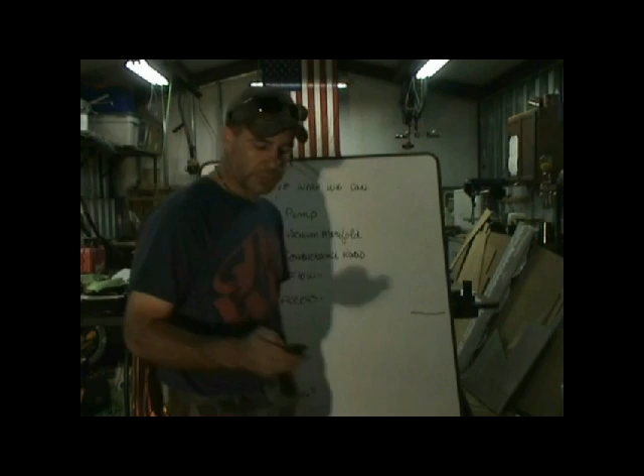Okay, so we're going to cover now improving what we can control. Some things we can't control: the size of the copper on our system, the size of the copper used in the coils, the 1/4 inch access fittings. Those things that we can't control, we're not going to worry about. The things that we are going to worry about are the things that we can control. And to better illustrate that, I wrote them down on the whiteboard.

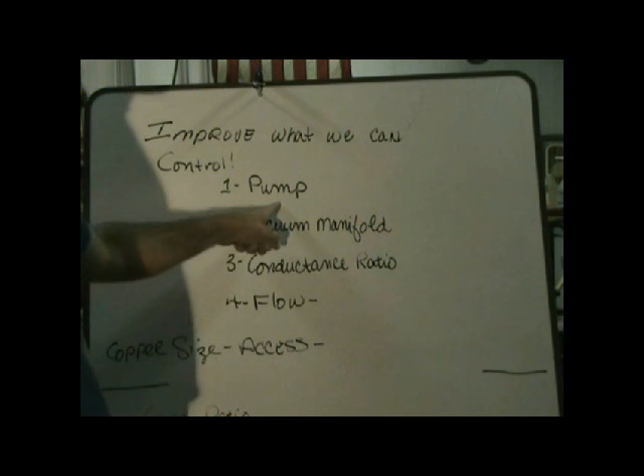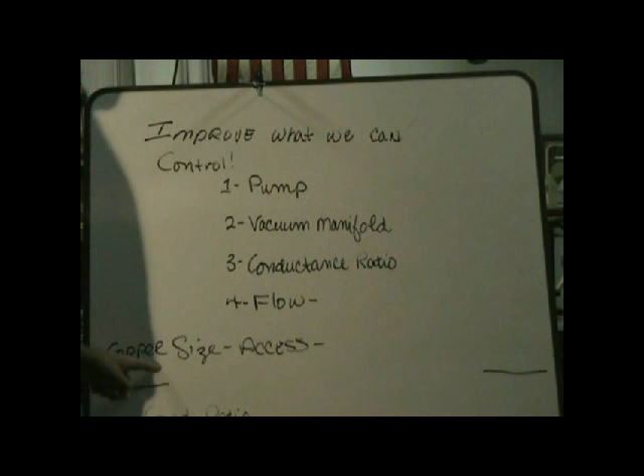So improve what we can control. The vacuum pump, choose the right pump. The vacuum manifold, build the right manifold. Conductance ratio, directly related to our vacuum manifold. Flow, directly related to conductance ratio. Again, what we can't control: copper size, access, all those things that we can't.

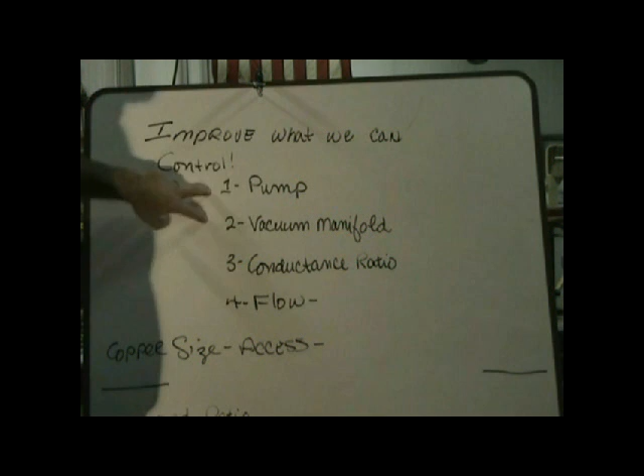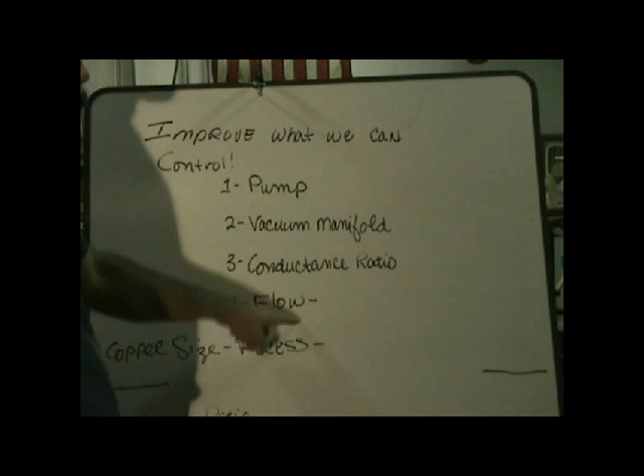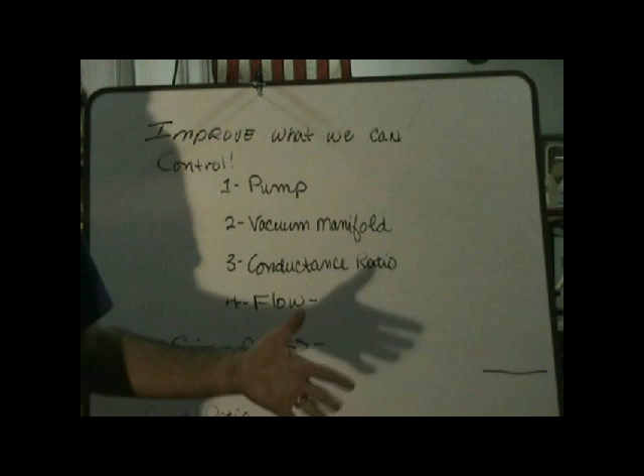So what we're going to improve on is really two things, the pump and the vacuum manifold, because the conductance ratio and flow, the higher we have the conductance ratio, the higher the flow we have, and that's how we're going to build our manifold, so we can control the pump and the vacuum manifold. And we're going to pick the right pump, and we're going to build the right manifold, or buy the stuff to build the right manifold. Very simple, very easy, and that's what we're going to do right now. We're going to build a manifold.

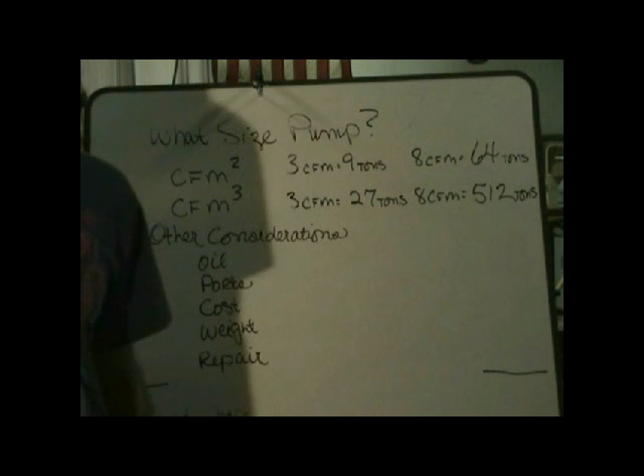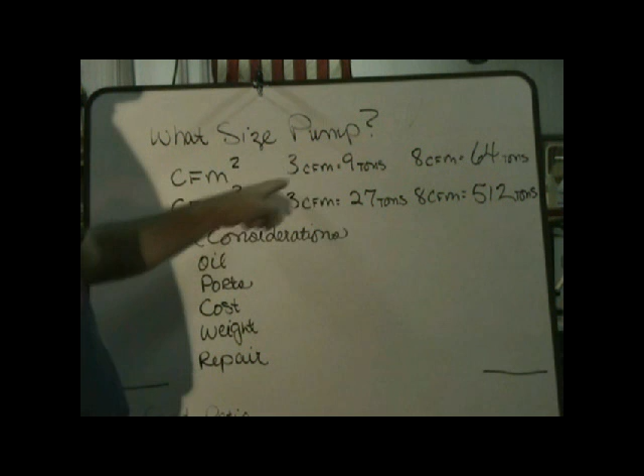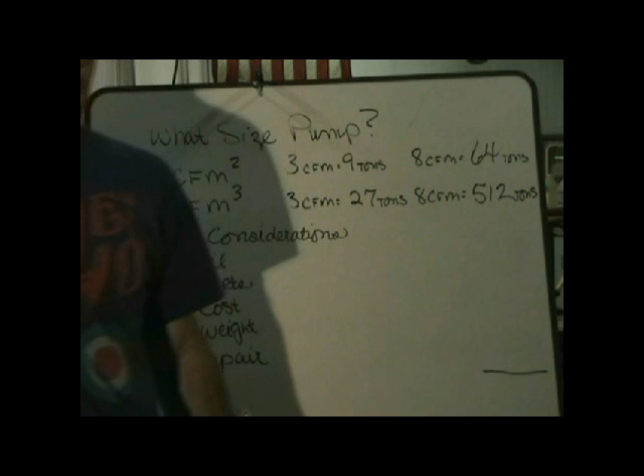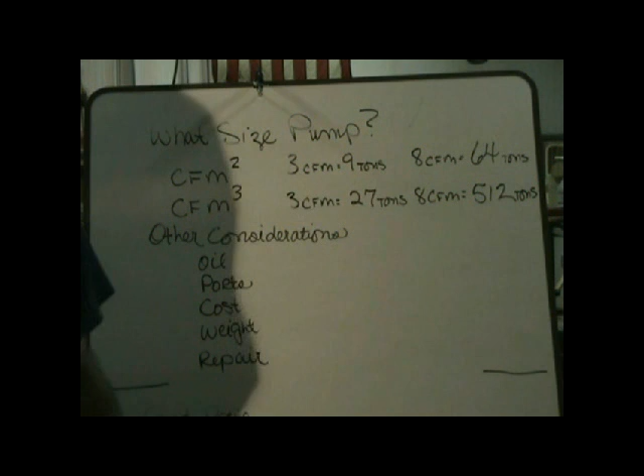Alright, pump sizing. Everybody always talks about pump sizing. I've heard CFM squared and I've heard CFM cubed. So just taking a look here, if you have a 3 CFM pump, squared, that's 9 tons. Cubed, that's 27 tons. 8 CFM pump, squared, 64 tons. Cubed, 512 tons. The review of vacuum for service engineers says a 3 CFM pump is good to about 10 tons, and a 6 is good to, I don't remember what it said, 50 tons or something like that. Didn't give a formula, it just stated it. And it said based on practical experience, whatever that is.

The CFM isn't the only consideration. It's just not the only consideration. Other things to consider are how much oil does it hold? How easy is it to change? Can you get the oil reservoir clean? How many ports does it have? 1? Is it 3/8? Is it 1/2 inch? Are you going to have to change it? Are you going to have to add to it? The cost. How much does it cost initially and in the long run? If you buy a $300 pump, but you have to buy one every 2 years, then you're probably not doing yourself any good. Weight. I don't want to carry a 35-pound pump around if I can have one that weighs 28 pounds or even 24 pounds.

And what about repair? Field repairable? Is it easily field repairable? Do I have to send it in? Talk to other people, figure out the problems they've had with pumps and whether or not warranties were honored or rejected, or when they did buy the parts to rebuild it, would it have been cheaper, if you include their labor, to just buy a new pump? All these things have to be considered.

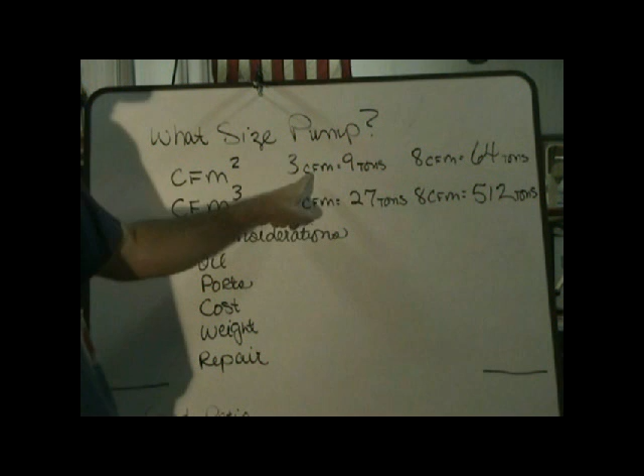But for strictly sizing considerations, I tend to agree with the CFM squared model, where 3 CFM is for 9 tons and 8 is up to 64 tons for a regular pump with just 1 port on it. But again, I've used my 3 CFM pump on 15 and 20 ton machines and had no problems. It works beautifully.

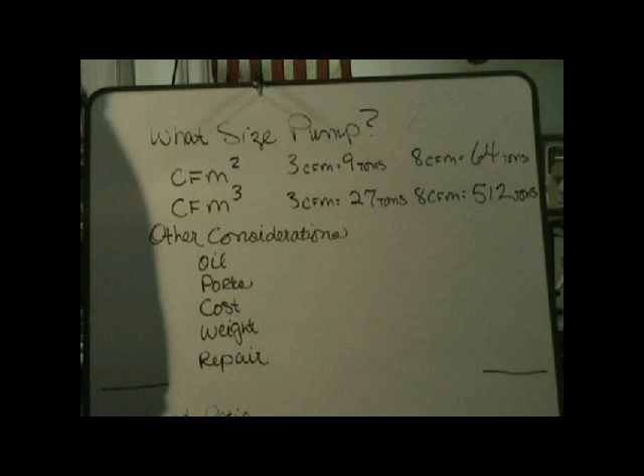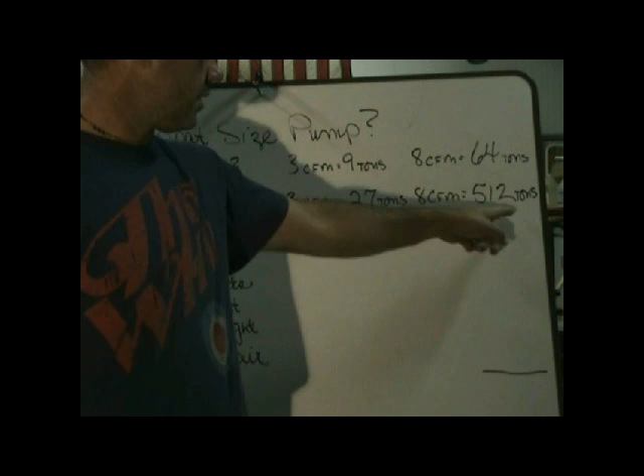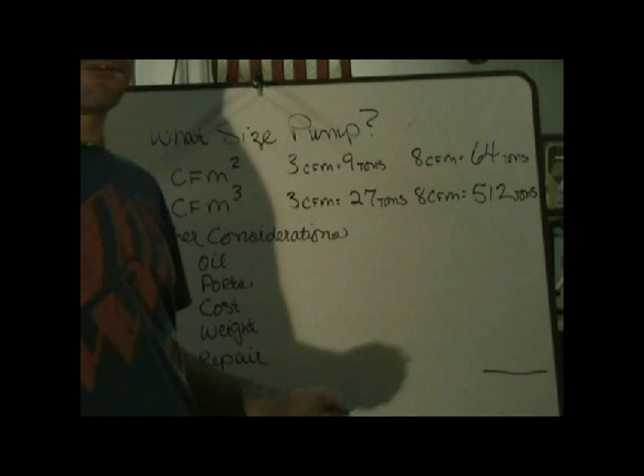I say all this because we're going to be reviewing the TEZ8 from Appion, and they pull 1,500 ton chillers and 250 ton chillers and all these big giant rack systems with this TEZ8, and not only do they do it, but they outperform 20 CFM pumps while doing it. So it takes 20 hours instead of 4 days versus a 20 CFM pump. And it's less about the size of the pump, and more about the manifold and the conductance ratio and the flows they get out of it.

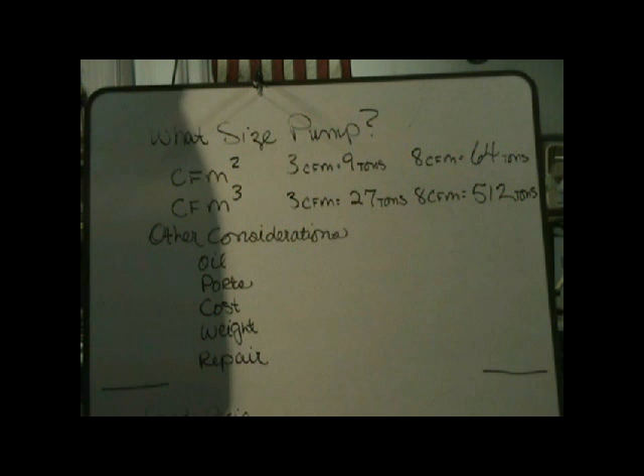So, what size pump? You control that. If all you ever do is residential and you're never going to do anything over 5 tons or even 10 tons or 15 tons, a 3 CFM pump makes perfect sense.

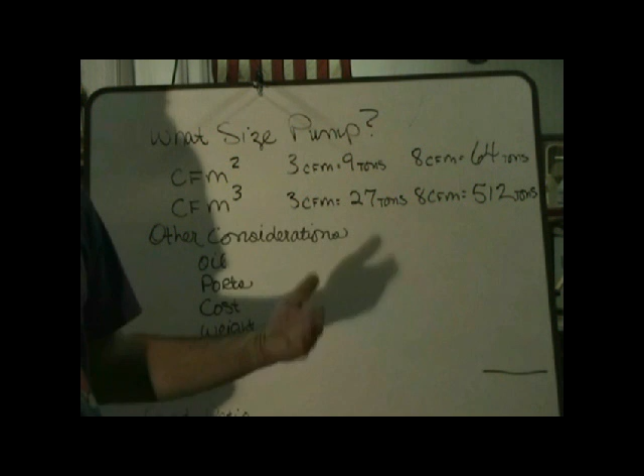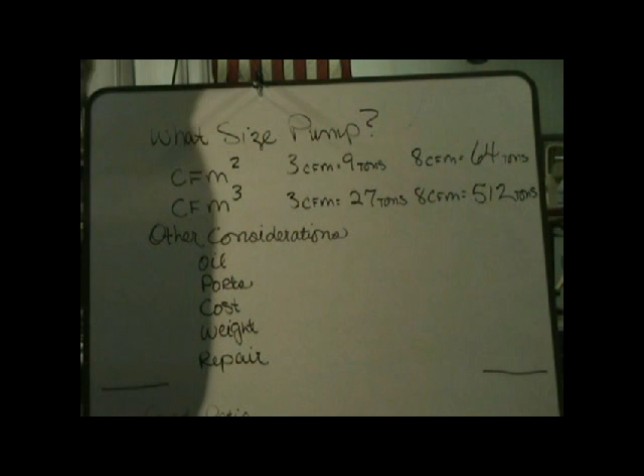By the same token, if you do light commercial and you're going to be getting into some 25 ton stuff, or even 50 or 75 ton chillers and things like that, then you may want to look at going with a 6 or 8 CFM pump. Again, multiple connections, a better vacuum manifold. Those are the key things, the real key things.

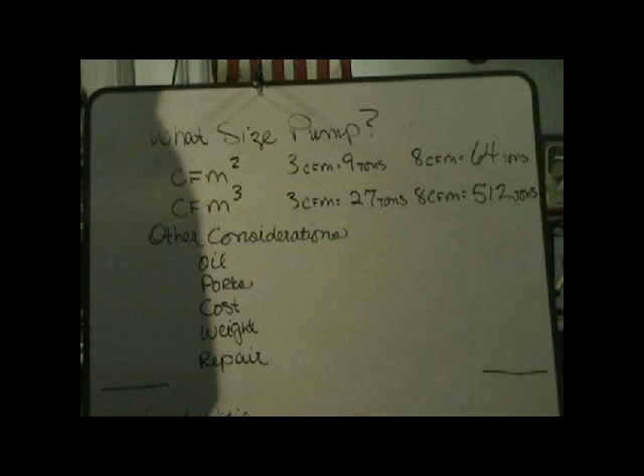The main thing to consider when you're buying a pump, especially for long term, is the oil. Can you clean the reservoir? Can you see the reservoir? Does the oil that you do see give you a clear indication of the true state of the oil? How many ports does it have? How much does it cost initially? How much does it cost in the long run? How much does it weigh? Is it 24 pounds or 38 pounds?

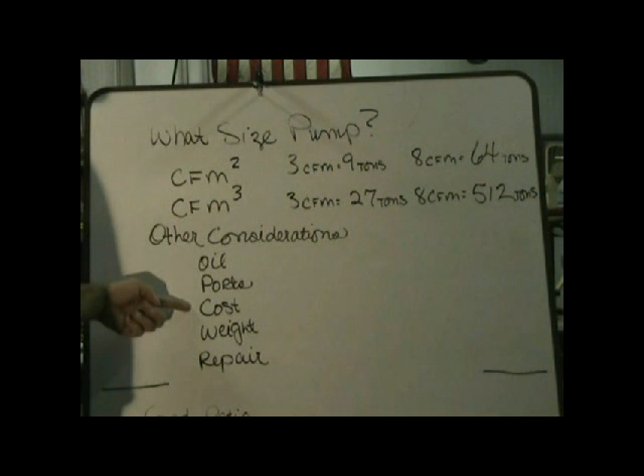And the repair. Can you buy the parts and repair them with normal tools? Or do you have to send it in and have it repaired? Or is there 6 weeks lead time on the parts? All those things need to be taken into consideration. So we can control the pump, the size, the long-term cost, and the short-term benefits of the features that are built into it. All right, part 2 of the equation on what we can control.

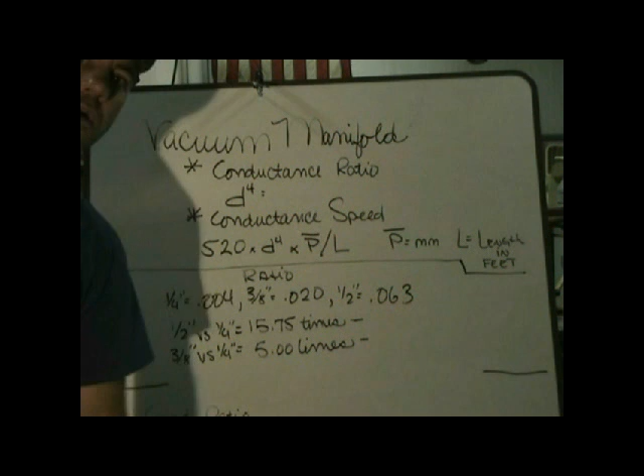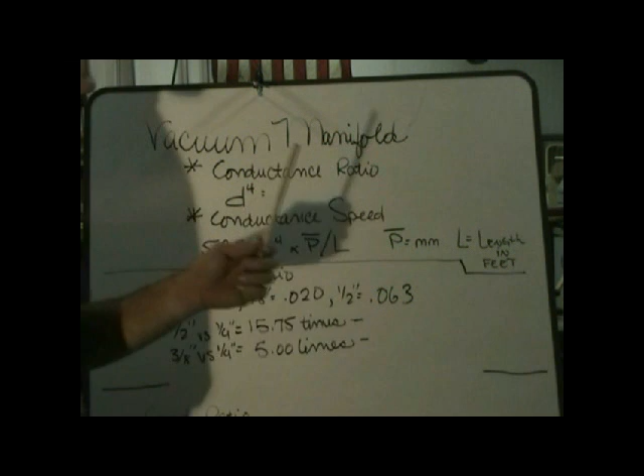Number 1 was pumps. Number 2, vacuum manifold. We're going to build the manifold. You're going to buy a manifold, you're going to buy fittings, you're going to buy hoses, whatever. From the unit to your pump is the vacuum manifold. That's what we're talking about. So 2 things really play an important factor in the manifold, and we're going to cover both of those right now: conductance ratio and conductance speed.

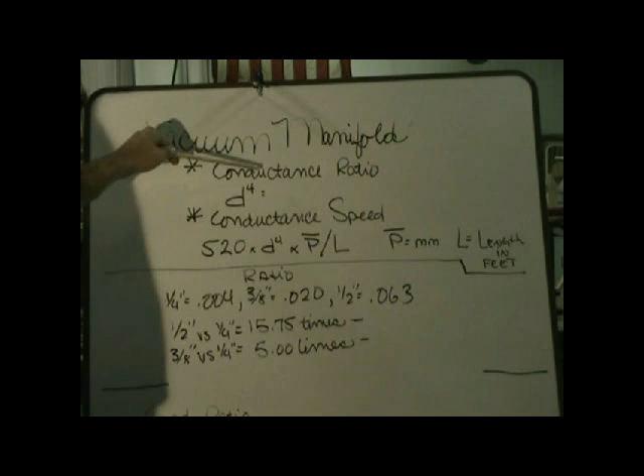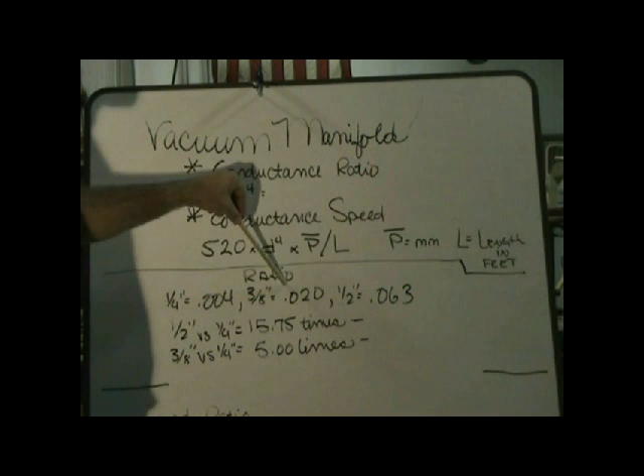Conductance ratio is nothing more than a ratio, and the mathematical formula to find that out is the inside diameter of the line raised to the 4th power. So come right down here and look. 1/4 inch has a ratio of 0.004, 4 thousandths. 3/8 has a conductance ratio of 0.020, 20 thousandths. 1/2 inch has a conductance ratio of 0.063, 63 thousandths. So you can see the ratios increase with the size of the pipe. But what does it really mean?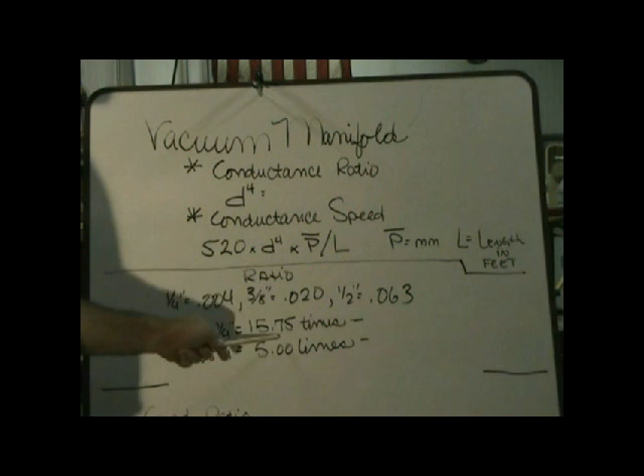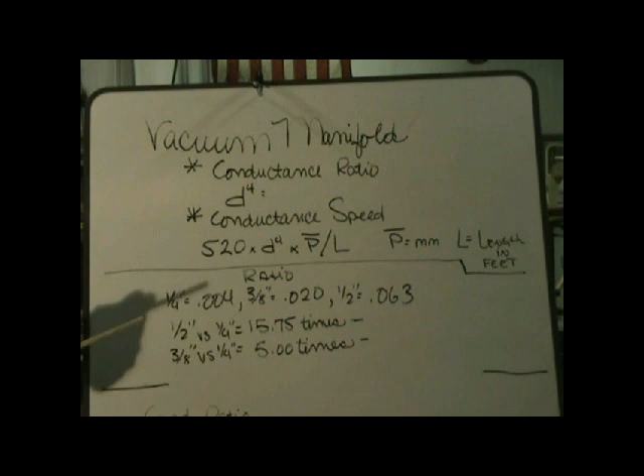Here, 1/2 inch versus 1/4 inch is a 15.75 increase. So 1/2 inch has almost 16 times the conductance ratio of 1/4 inch. 3/8 versus 1/4 inch, 5 times. So 3/8 has almost 5 times the conductance ratio of 1/4 inch.

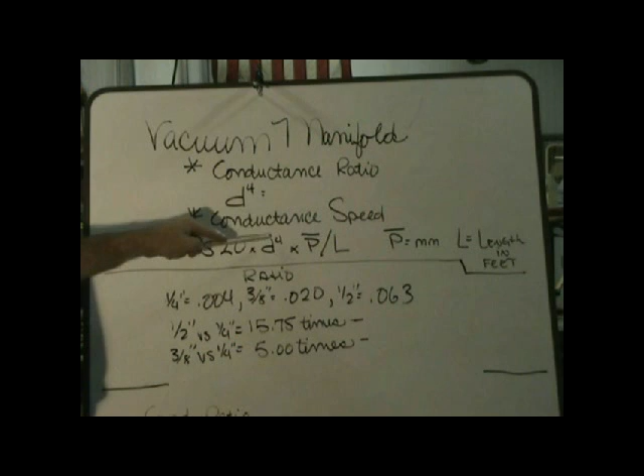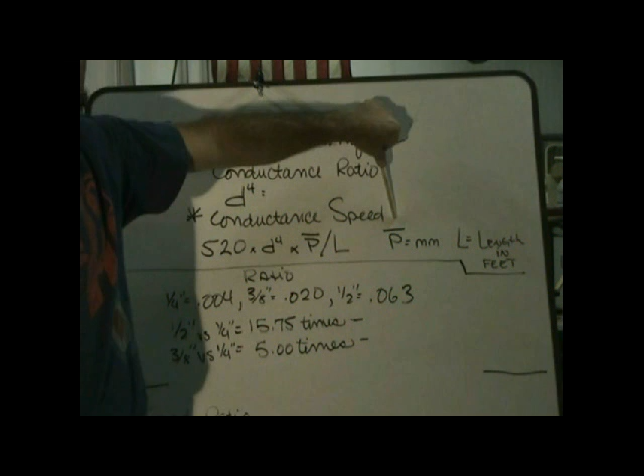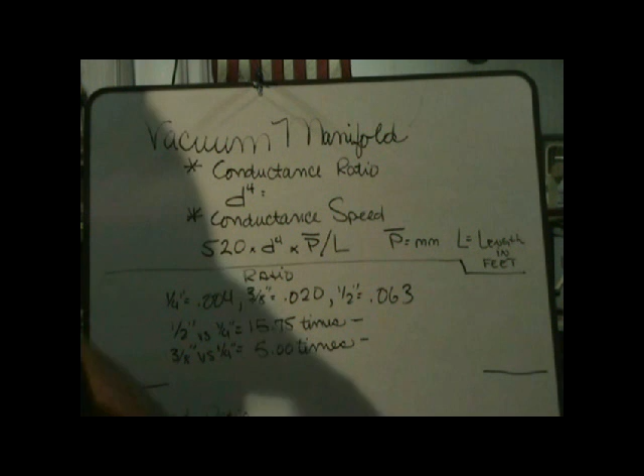And the reason we need to know what the conductance ratio is, is to find the conductance speed, which is our flow in CFM. Conductance speed is 520 times d to the 4th power, which is our conductance ratio, times pressure in millimeters divided by length in feet. So pressure in millimeters, length in feet. And I'm going to erase this and draw some more numbers on the board, and I'm going to show you what it means in the real world as far as flow.

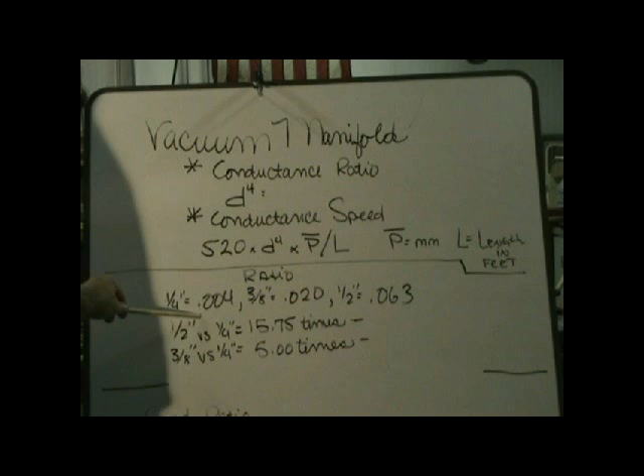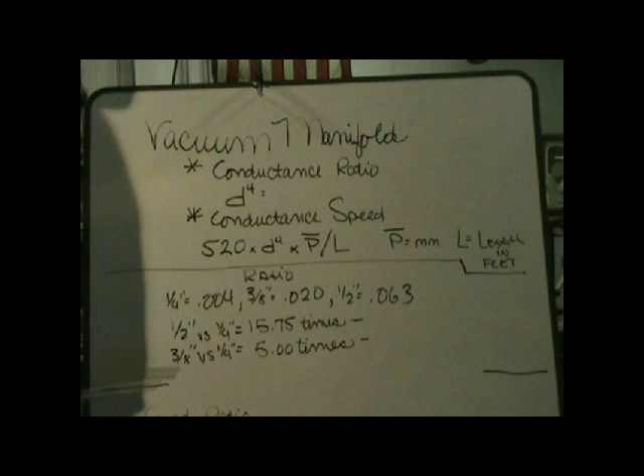But conductance ratio, inside diameter to the 4th power. So here at 1/4 inch, it's 0.250 times 0.250 times 0.250 times 0.250. That's what it is. You get that number. Same thing with 3/8, 0.375, 1/2 inch, 0.500. Do the math. You'll come up with the same thing. 1/2 inch has 15.75 times the conductance ratio of 1/4 inch. We're going to convert it into flow next.

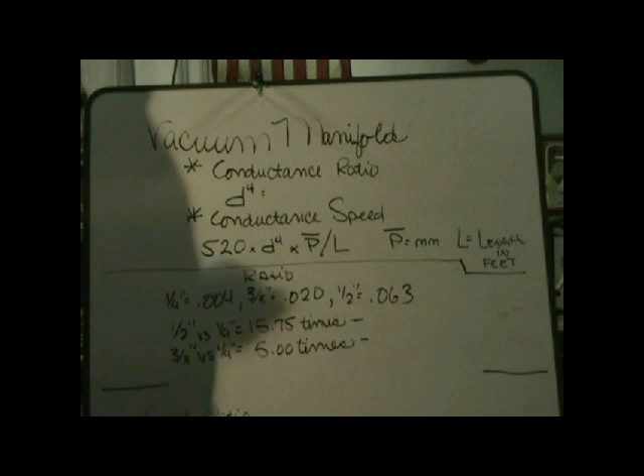Alright, so how do we convert all this into flow? How do we know what we're flowing? Well, it's not that hard. We use the formula 520 times the inside diameter raised to the 4th power times the pressure in millimeters divided by the length in feet. So for this little chart that I drew here, we're using 500 microns, which is 0.500 millimeters.

Here we have 1/4 inch, 3/8, and 1/2 inch. Down here we have lengths, 3 foot, 5 foot, 6 foot. So we have both variables in here. So for 1/4 inch, here's the inside diameter raised to the 4th power, our conductance ratio. Here's the conductance ratio for 3/8, and here's the conductance ratio for 1/2 inch. So for 1/4 inch at 3 feet, the conductance, the CFM, is 0.347.

0.347. 3/8, 1.733, about 1 3/4 CFM. Half inch, 5.46, almost 5.5 CFM. Keep going down the chart. The longer we get, the worse it gets. 0.208 for quarter, 1.04 for 3/8, 3.27 for half. For 6-foot hoses, 0.173 for quarter, 0.866 for 3/8, 2.73 for half.

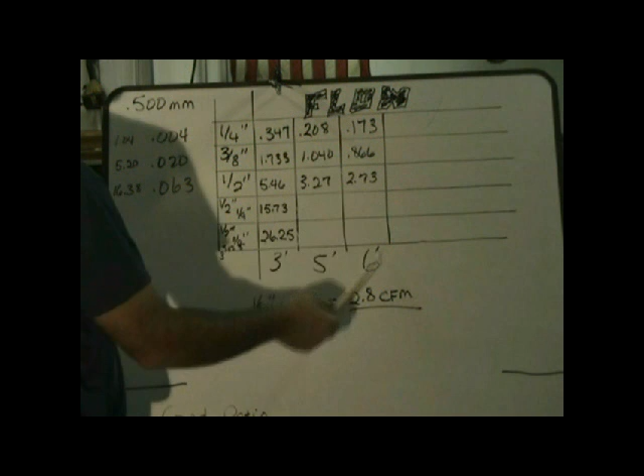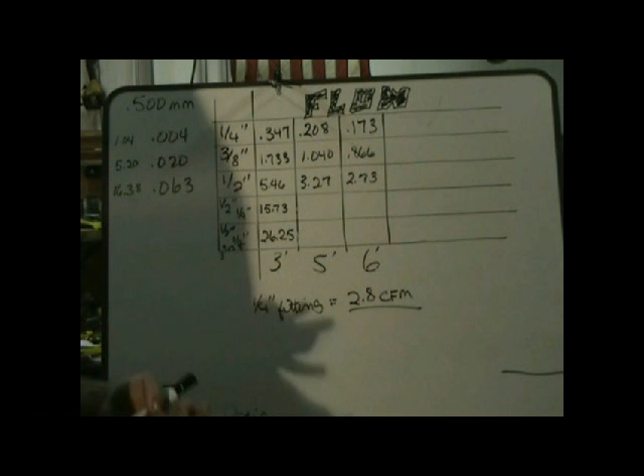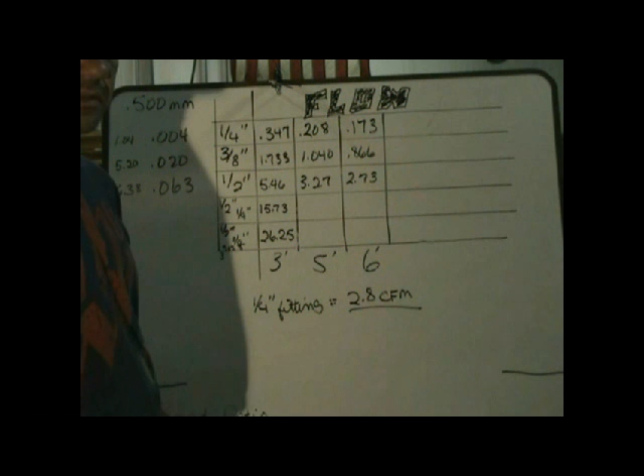Going up our chart, for 2.8 we could have a half inch hose that's 6 foot long and get very close to 2.8, or if we back it up to 5 foot long, we can do 3.27, with plenty left over. What this doesn't take into account is bends, turns, 45s on the ends of the hoses. So you have to take all that into consideration. It's just far too many variables. The only way to do it realistically is set up a lab with the exact conditions and put a hot wire anemometer across it to see what you're moving.

So what I tell you is, for virtually the same amount of money, just buy short, big hoses. Oversize it by double. If I have one hose capable of moving 5.46 CFM, almost double what my 1/4 inch fitting can move, I have reasonable assurance that I'm going to overcome those 45-degree fittings and bends in my hose. So yes, in a perfect world, you would only need a hose that moved 2.8 CFM. But in the world we live in, it's just too much math. Nobody's going to do it. 1/2 inch hoses, 3 foot long. 1/2 inch hoses, 5 foot long. I wouldn't go over 5 foot.

Unless you just had a big system and you needed that extra long reach and you could hook up 4 of them or 6 of them, then I'd go over 6 foot long. But not. If it's going to be over 6 foot long, I'm moving up to copper. I'm moving up to 7/8 or 1 inch or something like that, even steel pipe. But we're not going to do that because 6 foot hoses on a system, hook 4 of them up, hook 8 of them up, hook 4 1/2 inches and 2 3/8 or whatever, and overcome all that nonsense. Then you don't have to do all the extra plumbing.

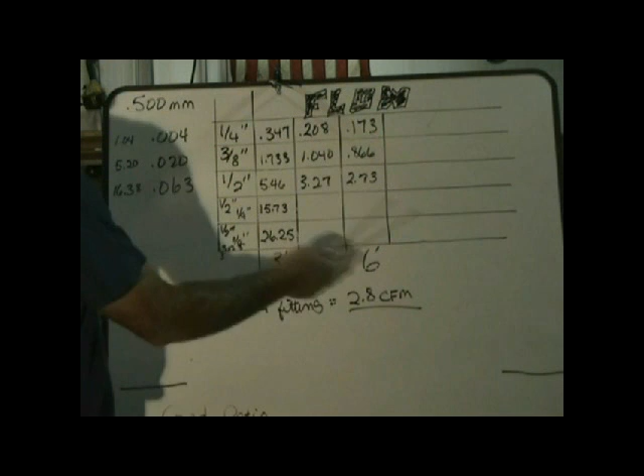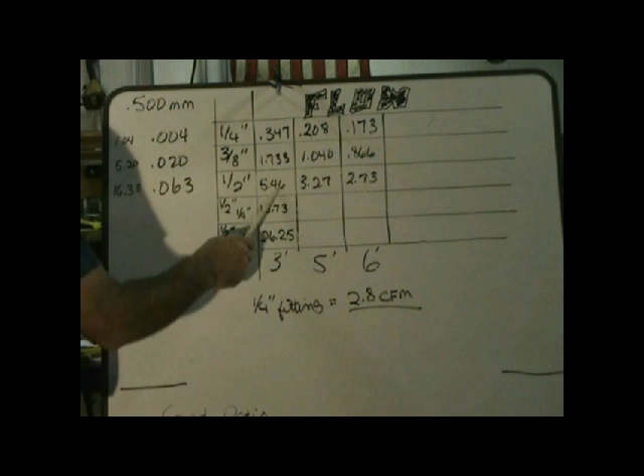So 1/4 inch fittings, 2.8 CFM. My 1/2 inch hoses will do 5.46 CFM. The next diagram I'm going to show you is the choke point and why we need 5.46 CFM, why we need to be able to handle that 5.46 CFM and what it means. So I'm going to pause, redraw, and be back.

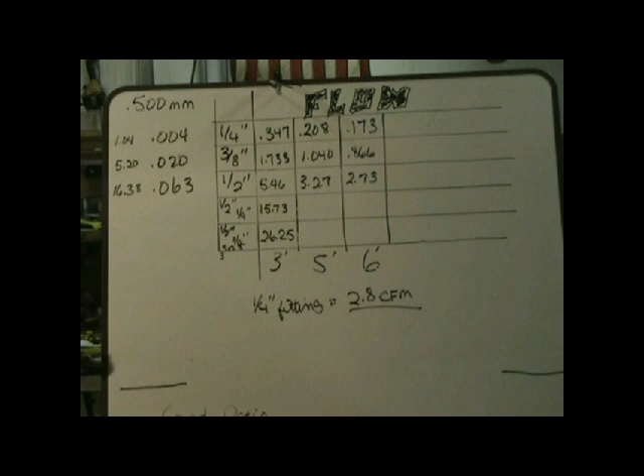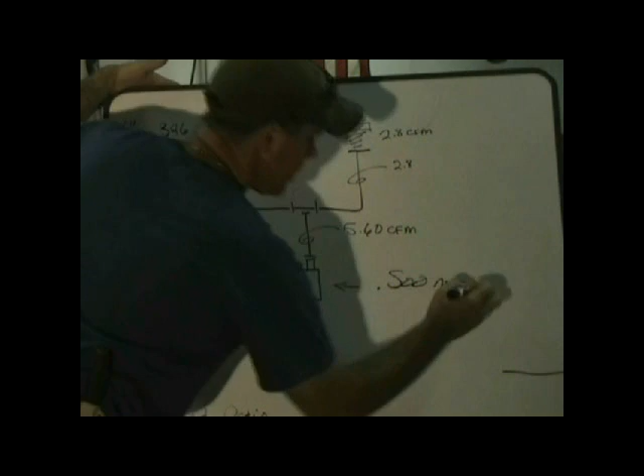Alright, look at the diagram. It's what I call a choke point. This is our pump, our 8 CFM or 6 CFM or whatever size pump it is. And again, 500 microns, 0.500 millimeter. So here's my access fitting and here's an access fitting. It's my 1/4 inch Schrader valve, 2.8 CFM, 2.8 CFM. So, in a perfect world, theoretical flow, I have 2.8 CFM and 2.8 CFM.

As soon as it goes into my T, or my vacuum manifold, or my Mega Flow, or whatever you call it, if I have a 1/2 inch bore, now I have to deal with 5.6 CFM. Okay? So we're taking these 2 CFM and we're turning them into 5.6 CFM. So this little 1/2 inch down here, which is about 6 inches, 8 inches long, needs to be able to handle 5.6 CFM. A 3-footer handles 5.46 if it's 1/2 inch, so I know my little 6 incher is going to be able to handle that.

2.8 CFM, 2.8 CFM. This is based on 1/2 inch hoses that are 3 foot long. Each one of these hoses will handle 5.46, so I know whatever variables are causing even further loss of flow other than just the pressure drop in my hoses, I'll be able to handle it. But let's just look at it. If I had 6 foot hoses here and here that were 1/2 inch, it'd be 2.73 CFM and 2.73 CFM. I know 2.8 and 2.73, not a whole lot of difference, and maybe you're right. Maybe it doesn't make that big of a difference. But this is theoretical flow.

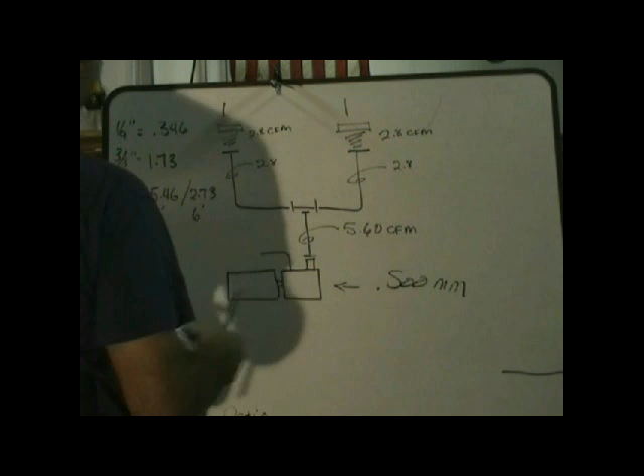1/4 inch, 0.346. You're moving 1/3 of a CFM, not 1 CFM, 1/3 of 1 CFM. So forget 1/4 inch, forget 3/8. You're not even moving theoretical flow. 1/2 inch, 6 foot hoses, 2.73, 3 foot hoses, 5.46. Yeah, but how can that be? We're used to thinking of pressure, and you know, you can't squeeze more and get more out the back and all that, but stop thinking about pressure and start thinking about flow.

As we start bringing these down in here, we want to keep that velocity up, right? We don't want to restrict it. We don't want to have good velocity here, and then by the time it gets here, have no velocity, because we've lost it all due to friction loss. We want the velocity to be maintained, which is why we go with a very, very short 6-inch hose from our manifold to our pump.

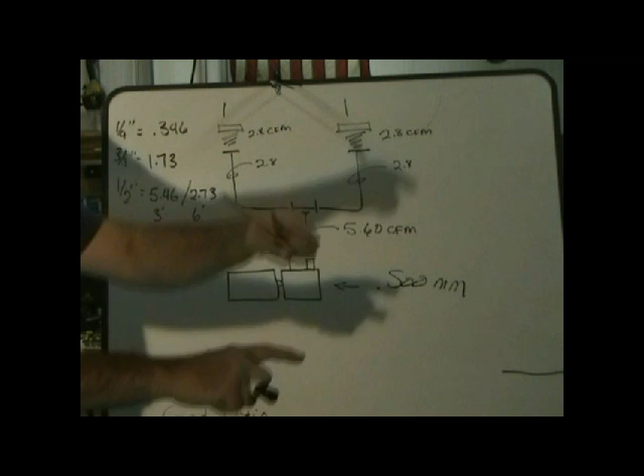We keep it as big as possible, 1/2 inch, man, even 3/4 inch. That would be cool. Big old 3/4 inch hose on there. Really suck it down. And then, of course, thinking about manifolds here, the Mega Flow manifold is a full 1/2 inch bore everywhere. Every hole they punch in that thing is a 1/2 inch bore, with the exception of the two for the gauges. Everything else is a 1/2 inch hole.

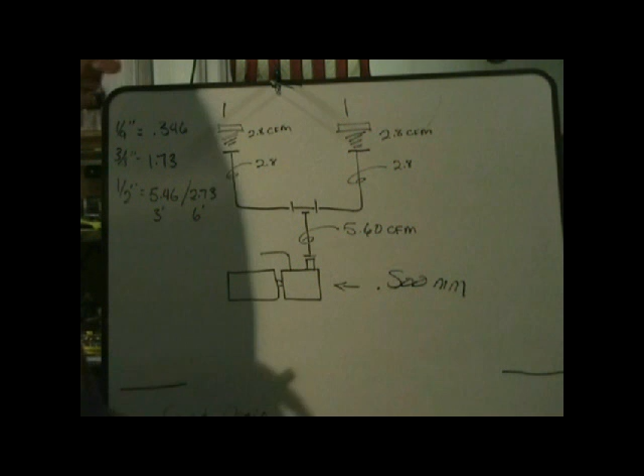My manifold I use is a 1/2 inch bore. You know, your refrigerant gauges with full bore 3/8 inch, whatever, man, throw that crap away. You want a 3/8 bore? Why do you want a 3/8 bore that's only going to move 1.73 at the maximum? That doesn't count having to go around valve stems and all that crap. Forget about it. Forget 3/8 bore.

Don't let them sell you that crap, and don't buy it because they say it's better. It's not better. 3/8 bore is nothing. It's limiting, that's what it is. A 3/8 bore on a refrigerant manifold, if you're using it for vacuum, is costing you money. Don't let them BS you. So again, 2.8 CFM is the max we're going to get out of it.

500 microns. 1/2 inch hoses, you can see here, translate into maximum CFM. Yes, 5.46 CFM is a whole lot more than we need, but because we don't know the other variables, and I don't know how to calculate them and show that, we're going to go as big as we can on CFMs to overcome those. Again, we're moving theoretically 5.6 CFM at our pump here.

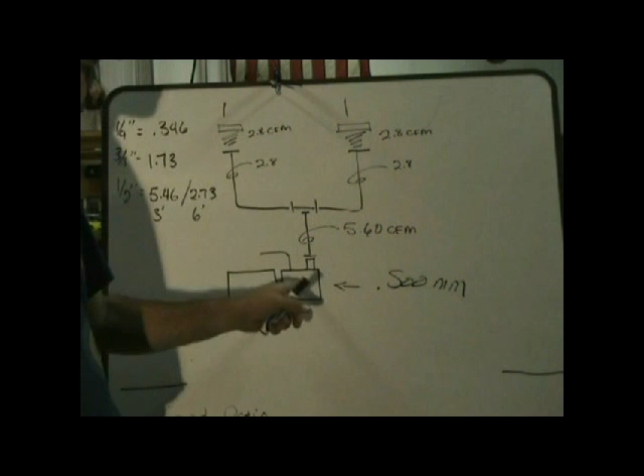So if we're looking at this, maybe a 6 CFM pump might not be a bad idea. Like I said, though, in the real world, a 3 CFM pump works. The pump down time between 3 CFM and 6 CFM on a recovery drum is seconds. Don't hold me to this, but it's like 6 minutes and 35 seconds versus 6 minutes and 47 seconds. It's ridiculous. A 6 CFM and a 3 CFM.

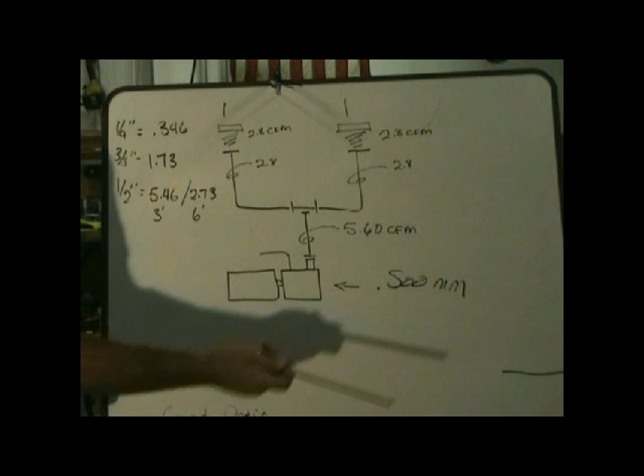All those being the same, except the pump and the CFM. It was even the same pump manufacturer. It was a JB3 and a JB6. But we're going to do pump downs later on with the Appions, so you'll get to see those numbers. But anyway, total CFM theoretical, CFM from each line.

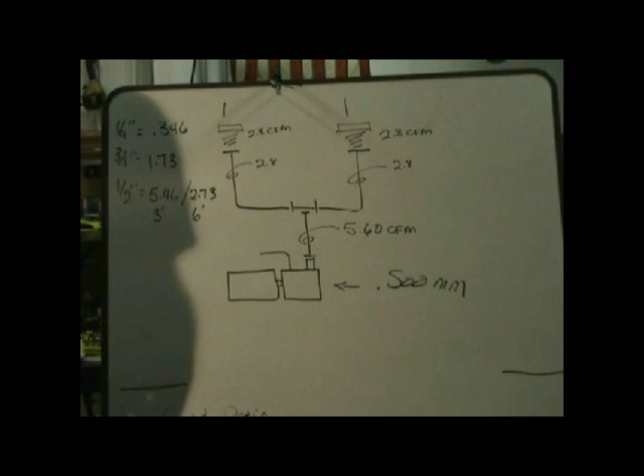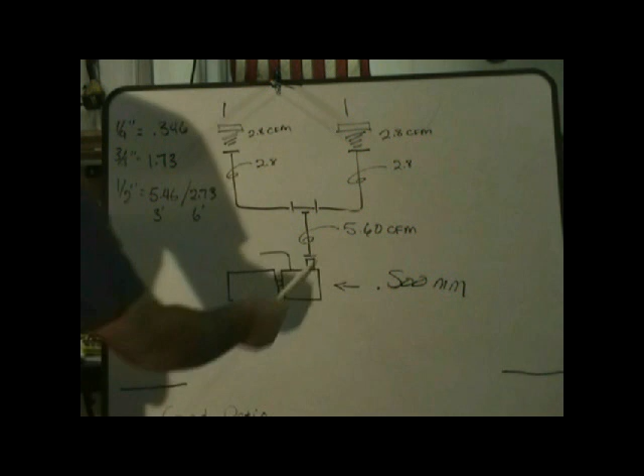Now, if you have multiple ports, like say it's a heat pump, and you could hook it up to a true suction port, or you took the time to solder in extra ports, maybe at the evaporator, hook another vacuum pump up there, then you're going to do even better. You're just going to do a whole lot better. The more hoses you have coming into here, the better it is, which is one of the things I like about the TEC8. It's got 4 ports on it.

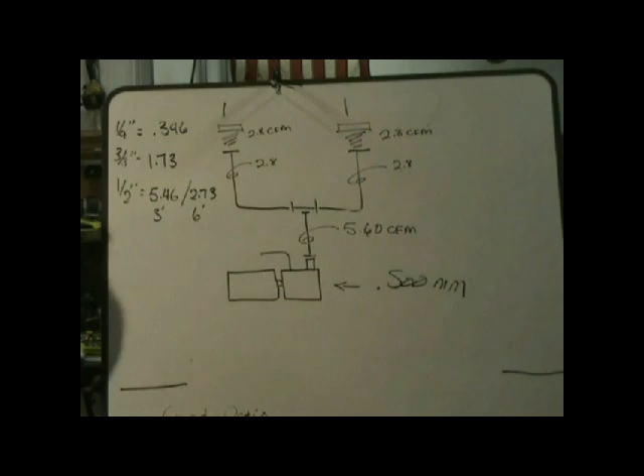I only ever used 3. I never used a 1/4 inch, but those 2 big 3/8 ports and that 1 big 1/2 inch port, and I can put a tree on there and bring 6 hoses, 7 hoses into that thing. It's phenomenal. Good stuff. So you can see how the conductance ratio translates directly into CFM. That's what we're doing here, right? We're finding out the CFM through this thing.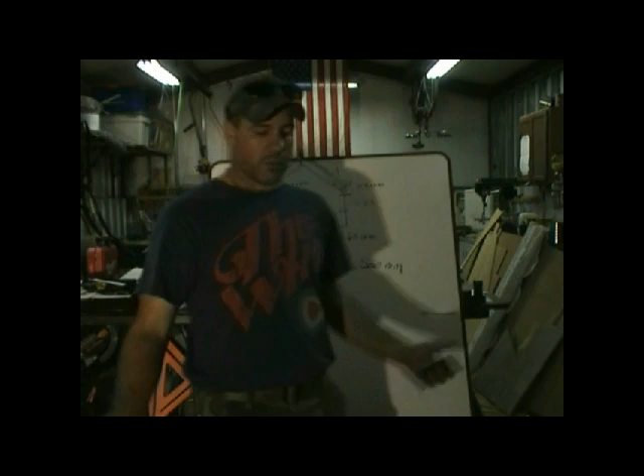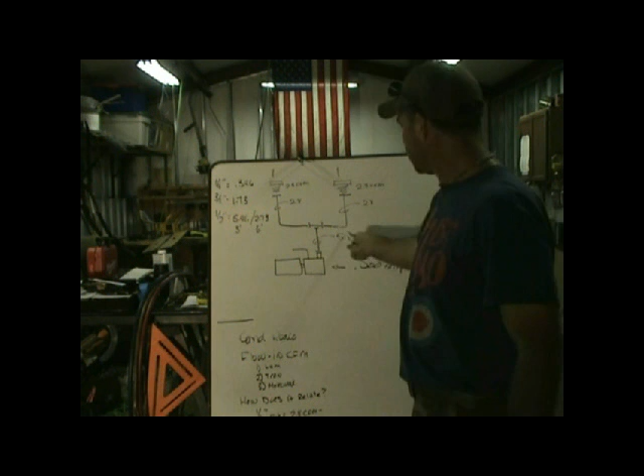The things we can't change, copper tubing sizes and all that stuff, forget about that. Look at the math. I know it's only theoretical, but look at the math. If you want to pull 6 CFM, it's entirely possible. Well, 5 2/3 CFM is entirely possible with 2.8 coming out of 1. And it really is entirely possible if you hook up 2 1/2 inch hoses and then 2 3/8 hoses to the system. It's entirely possible to get 6 CFM out of that system.

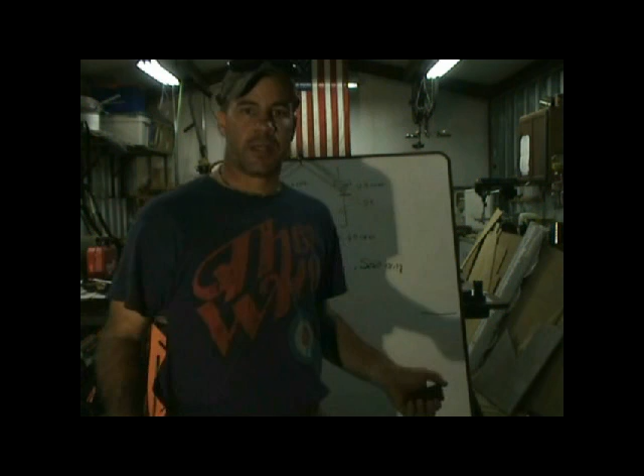And again, we're talking about 500 microns. We're going to talk about flows under a vacuum here in just a second. I'm going to erase, I'm going to rewrite, and I'll be right back.

Right, flow. We've been talking about flow, CFM, and everything else. And I know invariably, because it always comes up: Brad, how can you be talking about CFM when all we're doing is moving molecules? Well, that is all we're doing, is moving molecules. And CFM is just a whole bunch of molecules at once.

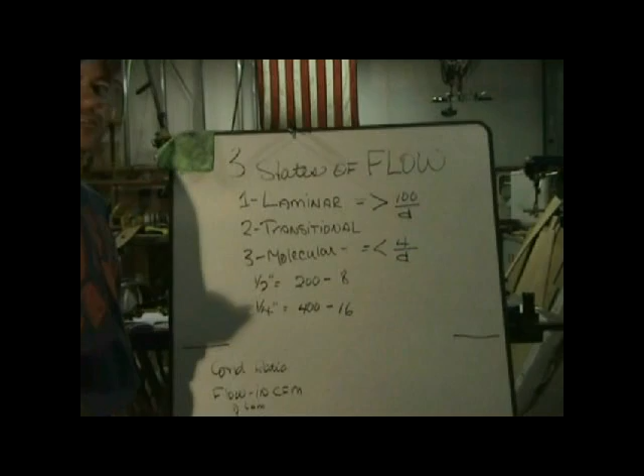So in the book, they tell us about 3 forms or 3 states of flow in a vacuum: laminar, transitional, and molecular. And they tell us how to determine what state we are in. It's pretty simple, actually. See where we are here? Perfect. So 3 states of flow: laminar flow, also called viscous flow; transitional flow; and molecular flow, also called diffusion. Diffusion? No.

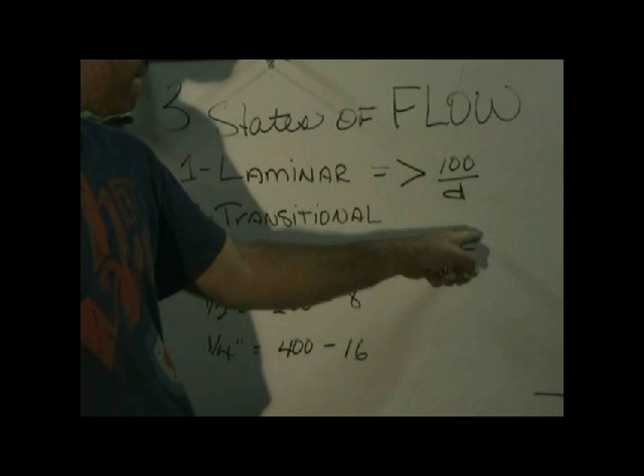I think it's diffusion. Anyway, it's just a mathematical formula. So laminar flow is when it's equal to or greater than 100 divided by D, where D is the interior dimension in inches of the line. Molecular is when it's equal to or less than 4 divided by D, the ID of the line in inches. So this is in microns.

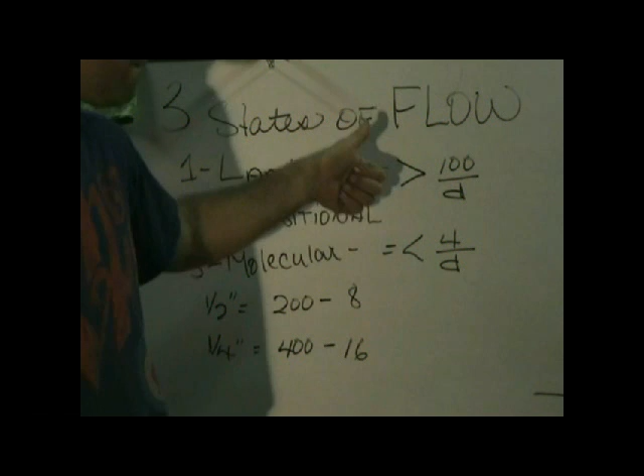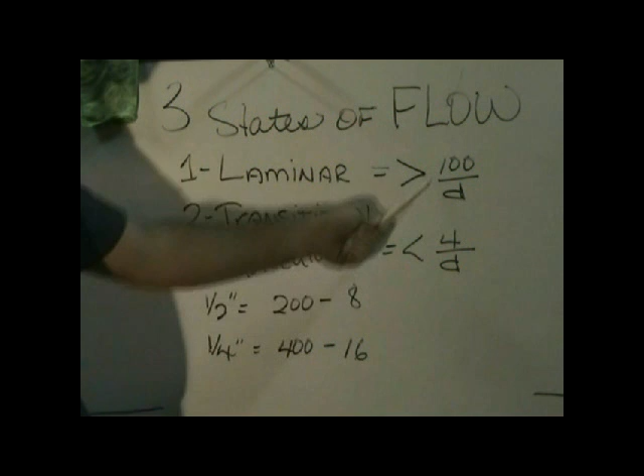So 100 divided by D, if it's equal to or greater than that, we're in laminar flow. If it's equal to or less than 4 divided by D in microns, we're in molecular flow. Between the two is transitional flow. It's really that simple. So here we have, bam, half-inch hose. Do the math. Equal to or greater than 200, laminar flow. Equal to or less than 8, molecular flow. So between 200 and 8, we're in transitional flow.

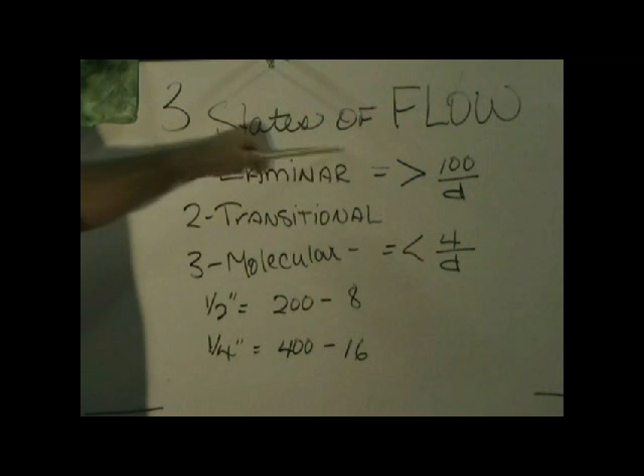What that means is, at 200 we have to be below 200 microns to even start to get into transitional flow. What that tells us is we very rarely get out of the laminar flow region, those of us who use half-inch hoses, because we don't get into transitional flow until we're below 200 microns. So you do the greatest amount of work in the laminar flow region. You're moving more in that region. So the goal is to stay in the laminar flow region for as long as possible.

So you look at 1/4 inch down here, and laminar flow ends at 400 microns, and molecular begins at 16, and transitional is in between. So it's pretty simple. Could these conditions exist inside the system somewhere? Yes, they could. Could they exist at the Schrader valves? I guess they could, unless you were actually taking a micron reading right there at it and knew for sure exactly how much it is.

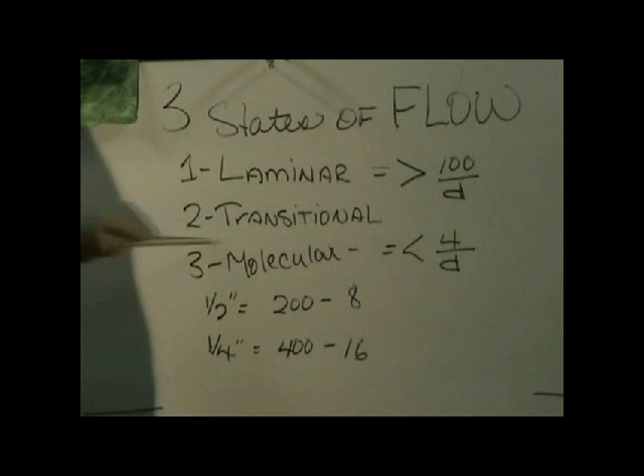So, sometimes when we see our vacuums start to stall out at about 250 or 275 microns, if you're going down below that, then likely you have entered the transitional phase. All those unknown variables I was talking about earlier have added up somewhere, so that the total diameter of the entire system is between this and this, and you're in that transitional flow. But by and large, we don't deal with that. We get to 500 microns or 400 microns, we're done.

And again, the longer you stay in laminar flow, the faster you're going to get done. That's just how it works. So laminar, transitional, molecular, 3 states of flow. We're talking about CFM, we're talking about laminar and transitional. By and large, by the time you get to molecular, you're not talking about CFM anymore. You are, but it's teeny, teeny, tiny. And that's an area that we don't even play in.

I don't even know who has a pump rated for 8 microns or even 16 microns. I had one pump that got down to like 18 microns one time, blanked off with the vacuum gauge right on it. That's the only one I've ever had, and that was 8-10 years ago. And it was a fluke, I think.

So anyway, that's it for episode 5. I'm going to go in, render this, get her done, and be back out mañana with the TEZ8, the MegaFlow kit, some oil, some pump down tests, and you know, the exciting stuff. So I hope you learned something. That's probably going to be it for the whiteboard. There might be a little bit more, but not a whole lot.